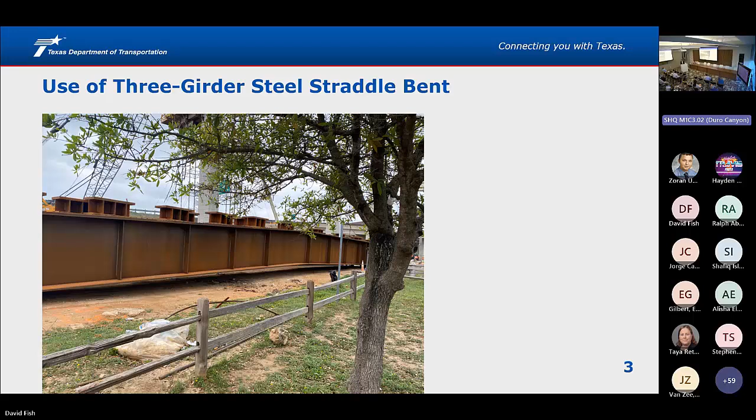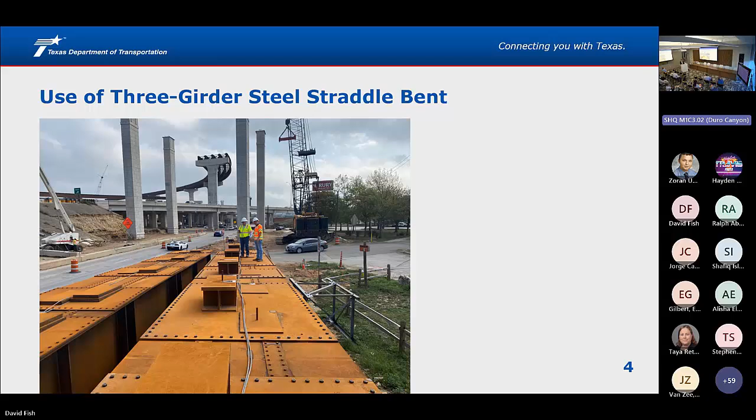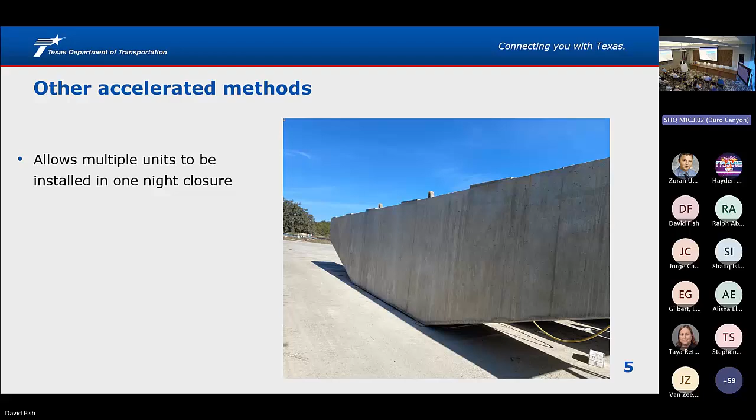But this wasn't the only prefabricated element that we used on the project. We viewed it as one of many tools that we used. So this interchange was, I recently realized, the first interchange that was designed and constructed in its entirety in the district. Typically, from what I've noticed, we build out maybe 2 DCs at a time, and then finish out the rest in a future project. So why we chose to do all the DCs at once in one design and one construction project, I don't know the exact background. I think it was because we had the money. That's probably the bigger driver.

So obviously, if you're doing all these DCs, it's very congested. I think Nico had a great slide that showed the entire interchange, and you saw a lot of lines, right? A lot of ramps, a lot of existing ramps that we had to keep open. And so when we were designing this, we had LJA do a really deep dive into where possible erection cranes might be placed, where shoring towers might be placed. Williams Brothers might disagree that it was a great job, but I think it was a pretty thorough job. And we didn't know exactly who was going to get it and how it was going to be erected.

So in that deep dive, it became very apparent that the main lanes were going to be affected, at least for a substantial period of time. And so having the frontage roads open as a primary means of getting through the interchange became more and more apparent.

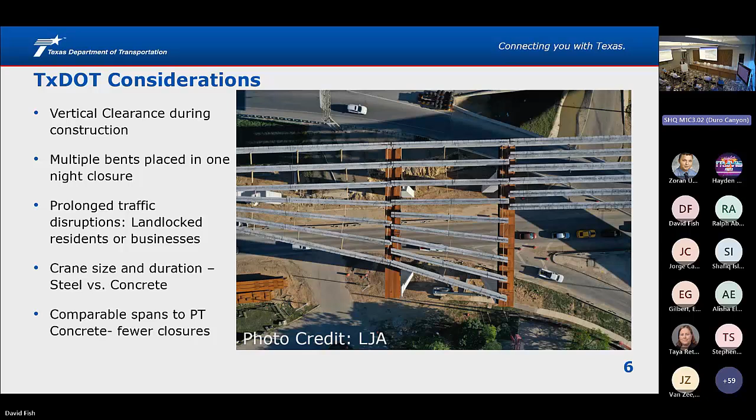So here I have some of the considerations for designers and the department. Vertical clearance is kind of an obvious one. Multiple bents placed in one night, that's another benefit. Prolonged traffic disruptions. Crane size and duration of being in the work zone. And lastly, comparable spans to PT caps. And then I'm going to discuss some of the nuances that we're taking into account.

So let me see. On the con side, the things that the department considered, really, I'm not sure how much it was discussed, but these can roughly be 2 to 3 times, if not more, the cost of traditional means. So that's something that really needs to be taken into account. And then for us, obviously you see we went with a weathering steel protective coating, or lack of an applied coating, but in other places you may have that as a maintenance cost in the future. That shouldn't be an issue for us.

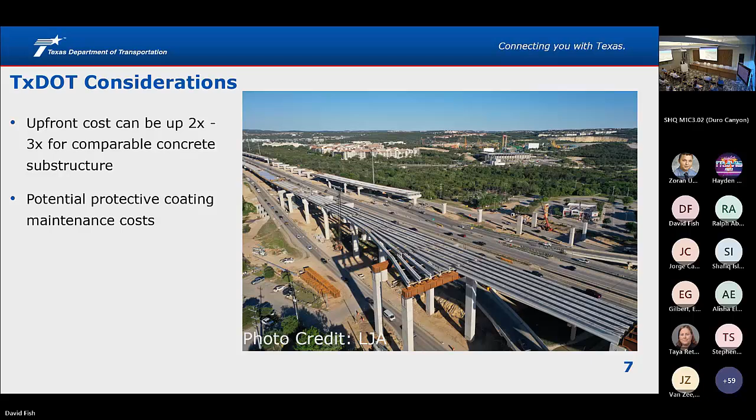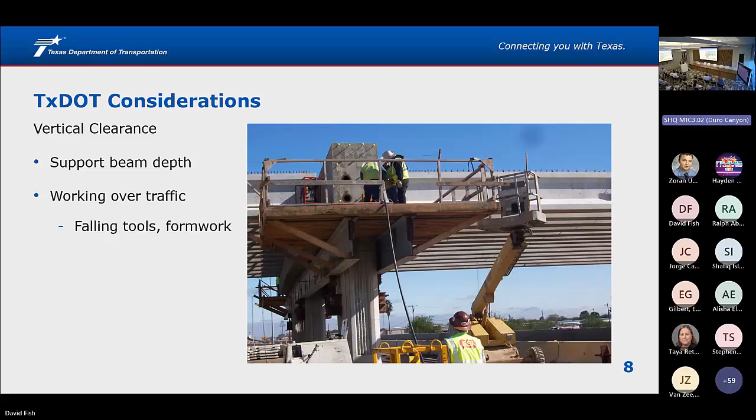Something I just want to bring up, working over traffic itself presents its own issues. Obviously, the risk of objects falling to the traffic below: falling tools, form work, hard hats. And again, I mentioned the congested work zone. I think this is something that doesn't often get looked at enough, but you have shore towers. They're used commonly. You see them. Form work that's up in the air. And a lot of times there's support lines. And there's not a lot that the designer can do to tell you where those supports, those guy wires, are going to be placed. And in a very congested work zone, that is an obstacle for the contractor to actually maintain.

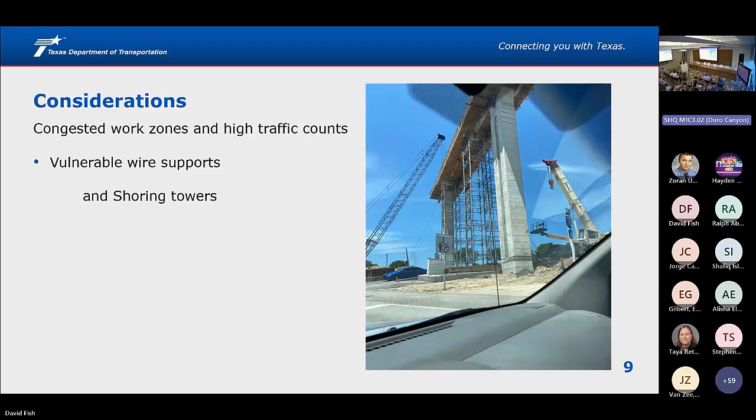Obviously, I think the most obvious selling point is the quickness in which you can erect these. These particular 2 bents that you see here were done in one night. And I'll discuss a little bit later maybe what it would take for more conventional means, but the contractor's limited really by the equipment that they have. If they had more cranes and had more caps to erect, they could probably have done that in a single night.

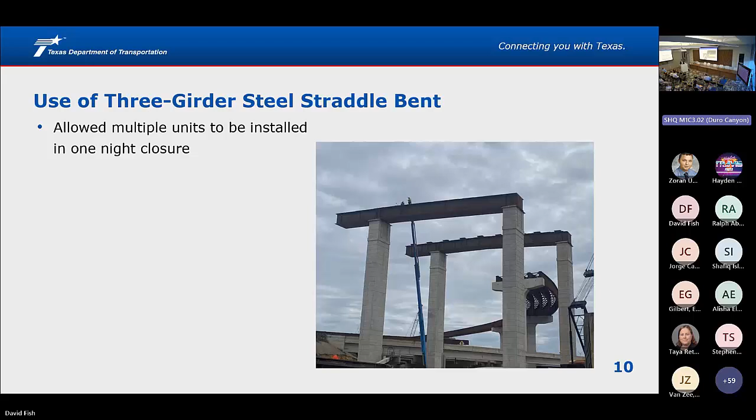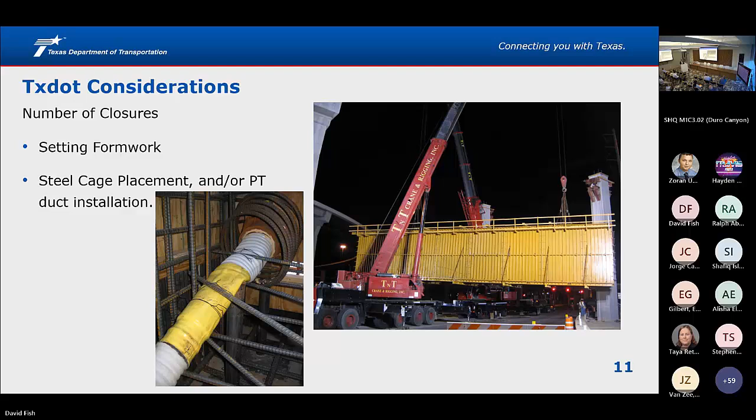I keep mentioning if we went with conventional means. I think in Texas at least, our conventional means is cast in place concrete. So you see here, if you count up all the closures, we're here setting forms, we're here placing steel cages. In the case of having a long span straddle, you're dealing with PT caps. So again, you have more time for installations.

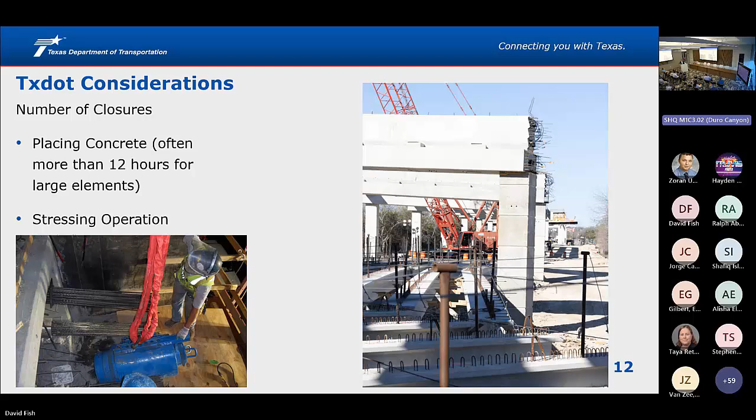And also when you're thinking about cast in place concrete, you're thinking of the time of placement. And if you're looking at really long spans, you're noticing that that placement might be upwards of 12, 15 hours. It's more than a nightly closure. You're affecting the next day, well into the next day. So that's also something to keep in mind. And then the rate of strength gain, that's also something to take in mind when you're going to be dropping forms. And again, if it's a PT element, you're looking at stressing. And I think the spec is updated to disallow stressing while having traffic below.

Other options that we considered and we utilized in some areas were precast caps for straddles. The San Antonio district, I think, is probably one of the first to use this in a very small application. But what we found was there's a weight-span length obstacle, if you want to say. And here you notice you see the 16 foot 2 inch vertical clearance, but we're really only reaching that 45 to 50 foot range, and then after that you kind of max out on the weight for practical lifting limits.

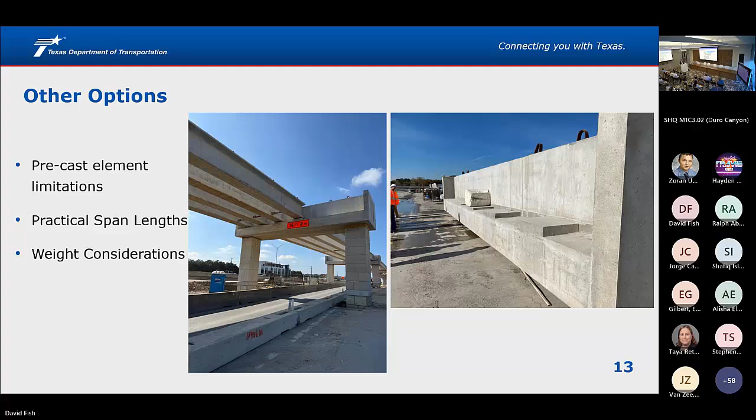So that's another thing that's sometimes not really understood or even paid attention to, the amount of time it takes and the footprint some of these larger cranes with their counterweights take. So while contractors can generally find cranes to lift certain loads, you have to think about the footprint that they're going to take.

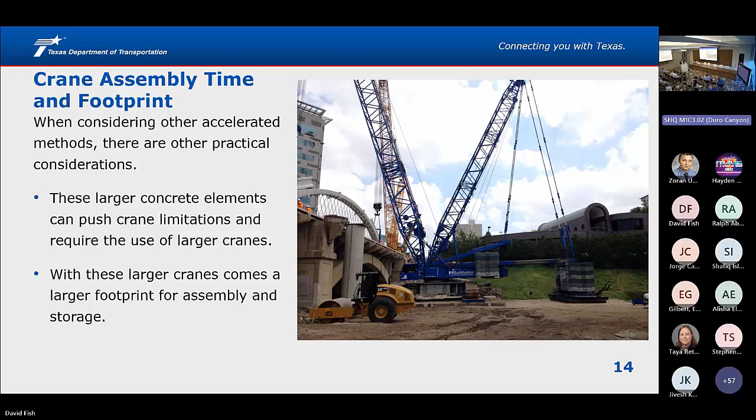Something that I thought should also be paid attention to is really the duration of that bridge. That seems to be something that people focus on. How long does it take to construct that bridge, and is there really any benefit? One of the things that you probably should think about is, it's not so much the length of the entire bridge, but what's that duration that you're affecting the public, right?

In our case, we've had main lane closures. We've allowed main lane closures all weekend. So we've had to put traffic on the frontage roads for extended periods of time. And so those bent caps that can be erected in one night are critical, at least in the San Antonio district. And I imagine other places in Texas, we're growing, obviously, and there's areas that might dictate the use of these and having limited impact on the traffic.

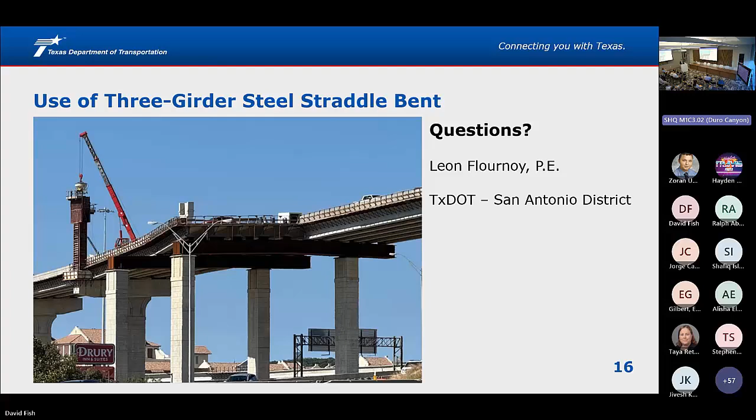Yes, Michelle. Did y'all consider the savings in traffic control costs? That's a really good question, Michelle. I didn't want to even delve into that here, right? There's user costs that are tremendous. There's the businesses that are affected, you could even throw that on top of the public's user cost, how much they're not making that weekend. And I think that could be a rabbit hole. But on the user cost, that's probably something that could be done. I just didn't delve into that deeply. The savings would be pretty significant as well. Yeah, certainly.